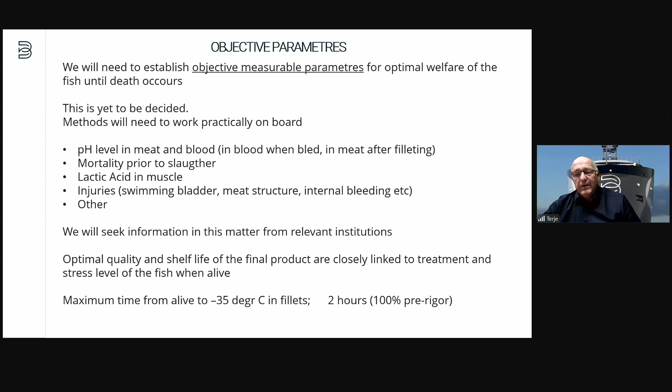So what we want and what has been built is double capacity motors and propellers that can move a lot of water slower. We don't want something that moves little water quicker, because that costs more fuel and money and emissions.

The goal in emissions, this is not the topic for today, but I can just mention it shortly, is on average, and we are going to fish whitefish and prawns, so this is a vessel that can do both. On whitefish, we can lower the emission against the standard trawler by 40%, which is amazing.

Then the system for catching, which is revolutionary. There is no system like this in existence, so this will be the new something that will start from January. So here there are 3. You can see 3 trawls outside. Then the end of the trawls are hauled on to the deck.

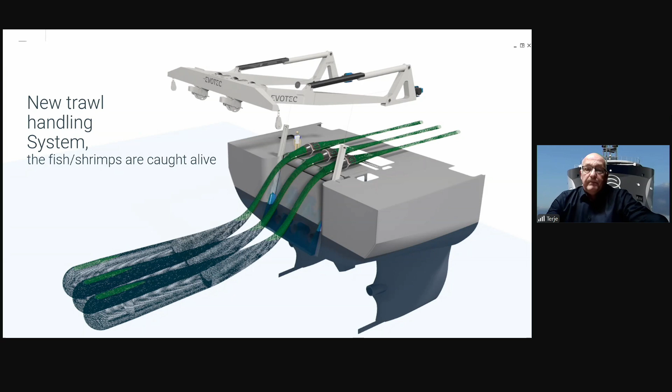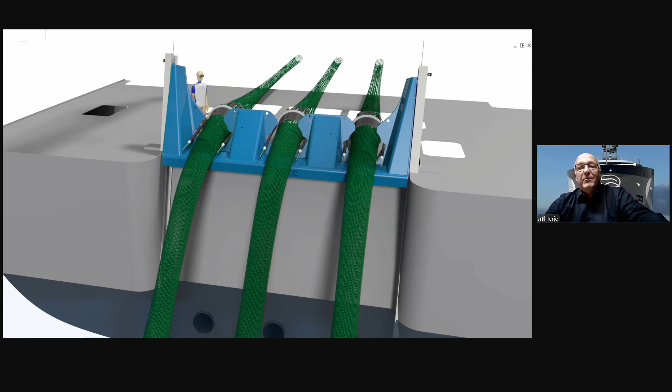Then there is a device coming up, as you can see, holding on to the trawl bags or whatever it's called. You can see on top there, that's called the fork. And then this grips and then you loosen the coupling there. Perhaps I'm using wrong English terms here, but then you lower it. So you separate it and you lower it, and you see the 3 holes at the bottom there.

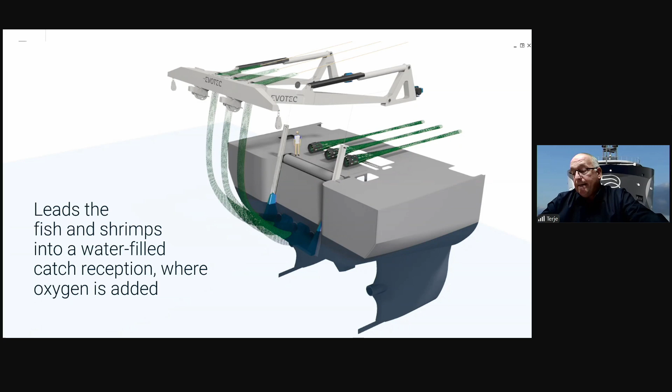That's below sea level, of course. And you lower it down there and connect it. Then the fork lifts it up, and it leads the fish and the shrimps. We can also do live shrimps into a water-filled catch reception. This is 3 different tanks, each 30 cubic meters. This is the illustration. And then we just look at the 1.5 minute illustration.

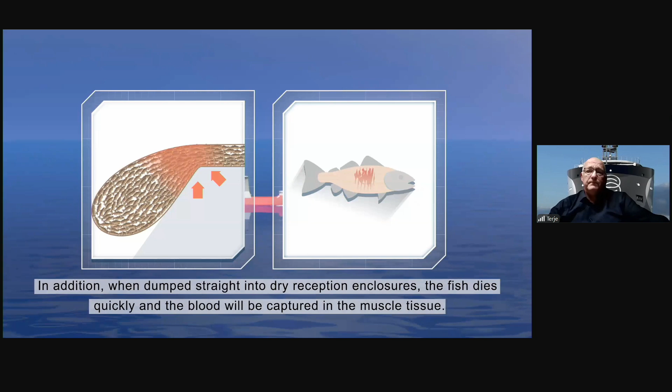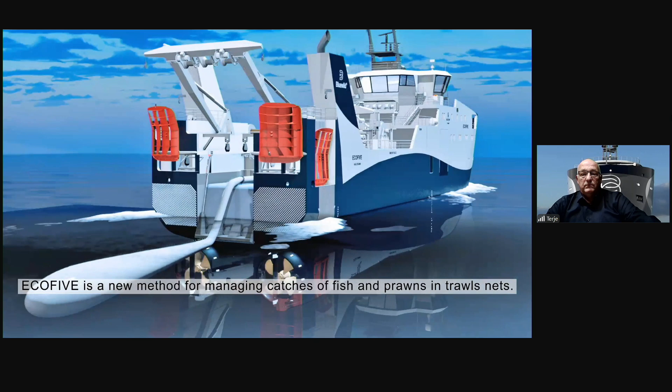Trawling has always presented some challenges. During the hauling of the trawl, fish can sustain crush injuries, abrasions and bloodstains. In addition, when dumped straight into dry reception enclosures, the fish dies quickly and the blood will be captured in the muscle tissue. The ECOFIVE solution from Bluewild is an ambitious venture that maintains high catch quality. ECOFIVE is a new method for managing catches of fish and prawns in trawl nets.

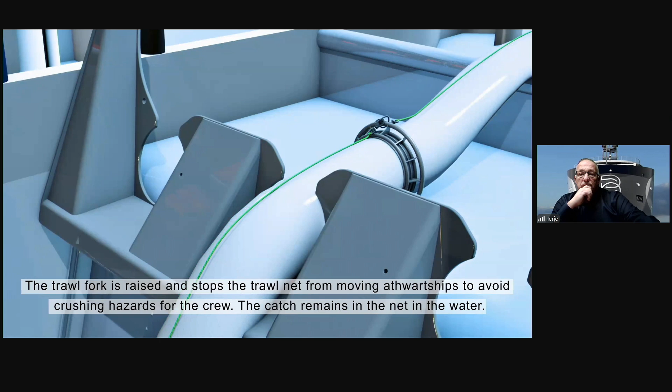The trawl fork is raised and stops the trawl net from moving athwartships to avoid crushing hazards for the crew. The catch remains in the net in the water. The trawl ring is guided into a groove in the trawl fork. Only when the rear gate is lowered, there will be a need for manual labour. The crew can safely release the front part of the trawl from the bag and connect the splitting strap from the cod end to the wire that runs over the A-frame.

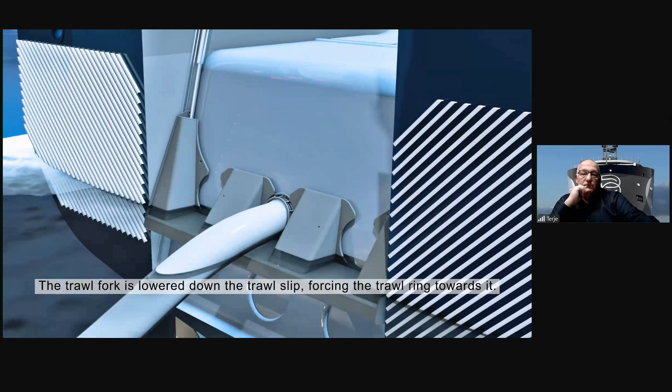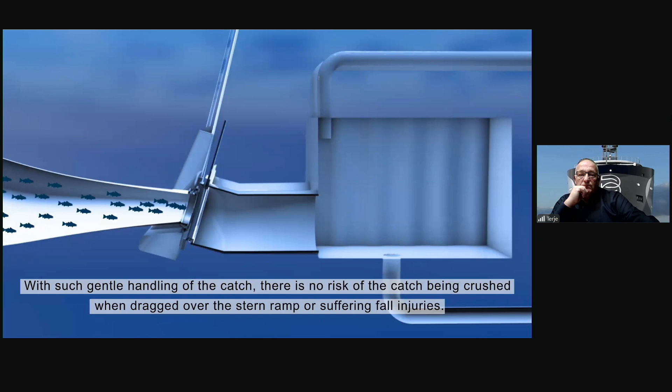The trawl fork is lowered down the trawl slip, forcing the trawl ring towards it. The A-frame will then lift the cod end to guide the catch forward towards the intake, enabling an even catch flow directly into the water-filled receiving tank. The valve is opened and the catch brought in. With such gentle handling of the catch, there is no risk of the catch being crushed when dragged over the stern ramp or suffering fall injuries.

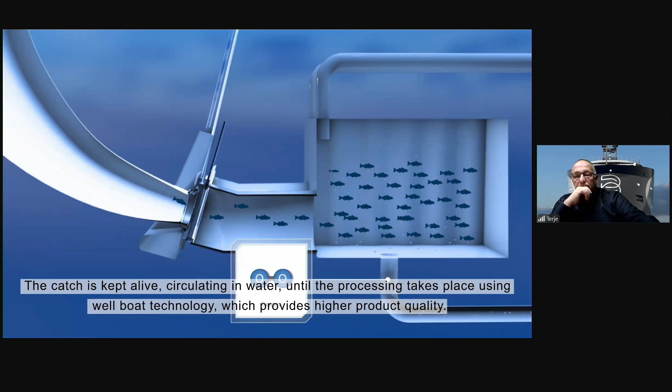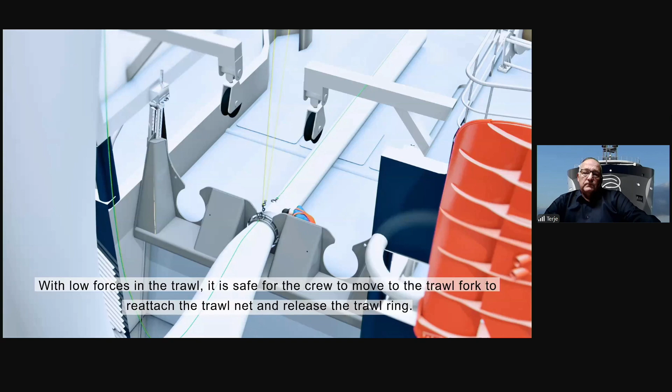The catch is kept alive, circulating in water until the processing takes place using well boat technology, which provides higher product quality. When the cod end is emptied, the valve is closed and the trawl fork returns up the trawl slip. With low forces in the trawl, it is safe for the crew to move to the trawl fork to reattach the trawl net and release the trawl ring.

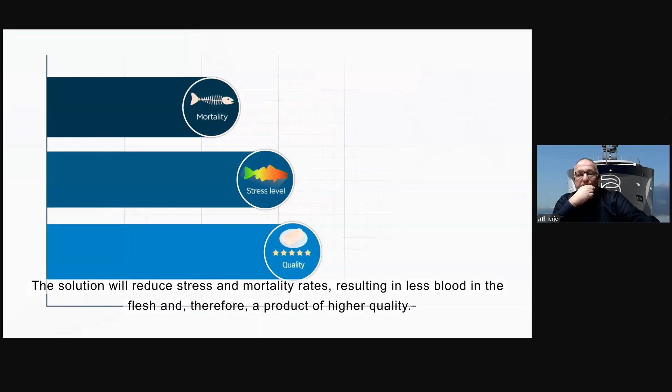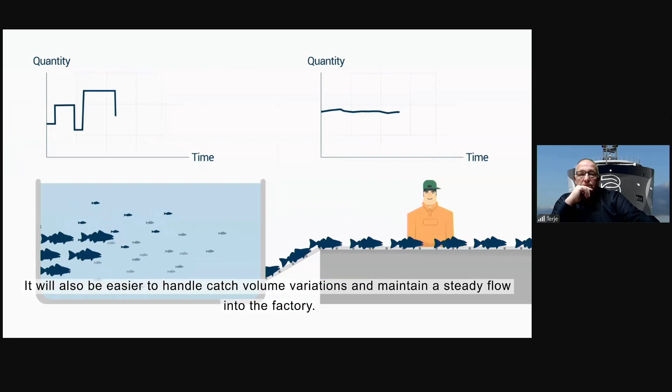The solution will reduce stress and mortality rates, resulting in less blood in the flesh and, therefore, a product of higher quality. It will also be easier to handle catch volume variations and maintain a steady flow into the factory. As a result, the vessel's capacity will be better utilized and there will be less strain on the crew. The Eco 5 trawler won the Innovation Award at the Nor-Fishing Exhibition in 2022 and was named Ship of the Year at the Nor-Shipping Exhibition in 2023.

So, when coming into the reception area, we have something called the sliding bulkhead. I just used Google Translate, skyveskott in Norwegian. And we use 2-bar overpressure. So it's not pumped. We don't need more than 2 bars in order for the fish to glide into the processing area where it is starting the process.

And we have exit on top and on bottom, so that, for example, the cod, if the swimming bladder hasn't exploded, then you get something called floaters, and they are still alive. So we want to take them out first so that they don't suffer and they don't suffocate. And then you have the fish that perhaps have died. We hope that that will be a minimum. That can be taken out at the bottom. And then anything in between is swimming and hopefully, if not enjoying it, they have less stress. So you take out the floaters and the dead to start with, and that happens immediately.

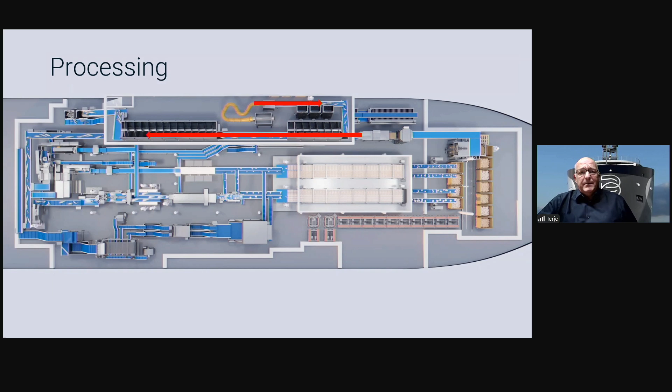Then it goes into first a Rotex for bleeding, and then a Rotex for taking the temperature down to 0 degrees. The whole vessel is cooled. The cooling medium is CO2. Then it goes into gutting and then deheading. And then it goes through the filleting line straight to the IQF freezer and into the packing area. 2 lines plus 1 redfish line, which I've not put up a red thing for.

And then it comes out of the packing area, which it keeps at minus 20 degrees, into labeling and then down to storage. The freezer is minus 47 degrees air temperature, so that the product comes out at minus 35. Then we have block freezing for heads and frames and skin, taking care of all of the fish, which we are then selling in other markets.

Then there is a prawn line where we can produce either raw for cooked and peeled or cooked shell-on. We are not peeling on board this vessel. It's only raw material for land-based cooked and peeled or shell-on cooked, through the same IQF freezer into the same large units, 400 kilos.

And then we have evaluated, the shrimps are coming in alive. We can pass it over the stunner, but at the moment it has been planned on taking it in, pumping the shrimp over to this line. But there is no problem for us, if we see it works and if it has an effect on welfare and quality, we can run it across the stunner and take it from there.

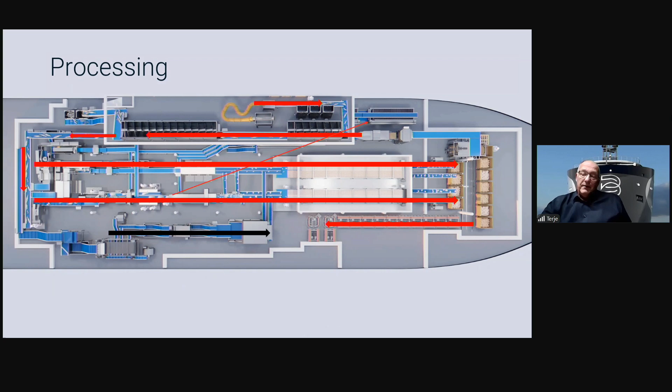So that means the two value chains on board, if you like: the fish comes in, live storage, electrical stunning, bleeding, cooling, grading, pre-rigor filleting, portioning is optional. We will do full fillets to start with, but that has to do with the value chains we are creating, but that's a different story. Minus 35 degrees, packed in jumbo boxes for easy further processing, secondary processing down the line closer to the market.

The shrimps are coming in, live storage. We have not put in electrical stunning. That might be possible. Grading and cooking optional. So the future is here, and the product will start to be available from next February. We expect a little bit of hassle to start with because the vessel is packed with new technology, a lot more than what you have seen here.

And in the meantime, we in the marketing department are establishing the value chains and the production hubs around Europe, because this is not like a spot product. This has to be a planned production. And alongside this, we are building new ERP solutions so that the customers that are on contract can actually follow, if we want, every box that is produced against the order as it has been labeled on board 2 hours after the fish was alive.